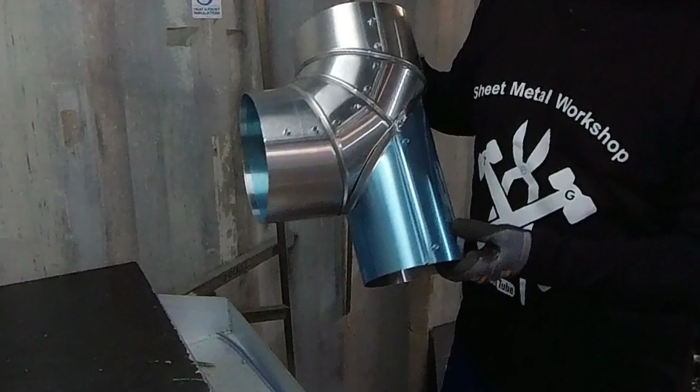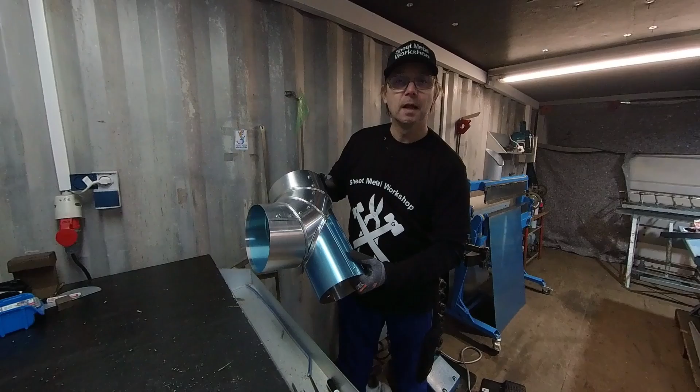In this video I'd like to show you how to make a trunnion. It's like a T-pipe coming on a segment bend, and that is what it's all about in this video. I'm just going to show how to make the template, and you can already see the end result of it, so let's start.

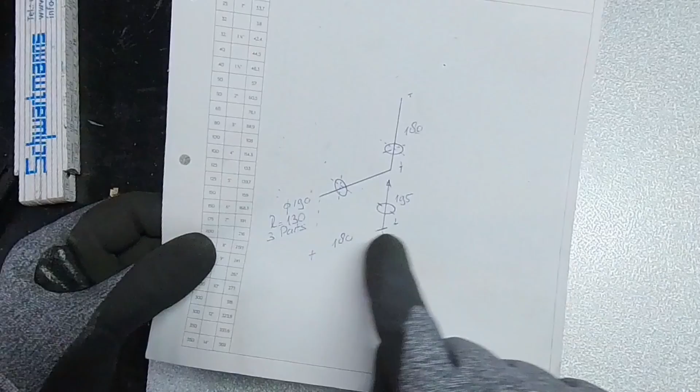Okay, so now I have here in front of me a sketch I've made already, and this is the bend. It's got a diameter of 190 millimeters, radius 130, and it's made out of 3 parts. And then we have here the trunnion coming. It's a smaller diameter, 150 millimeters. From the end of the trunnion until the center of the pipe, we have 195 millimeters. And from the center of the bend until the end of the bend, we have 180, and here also 180.

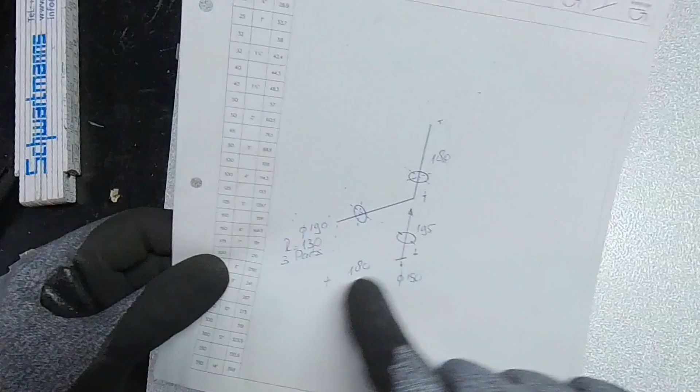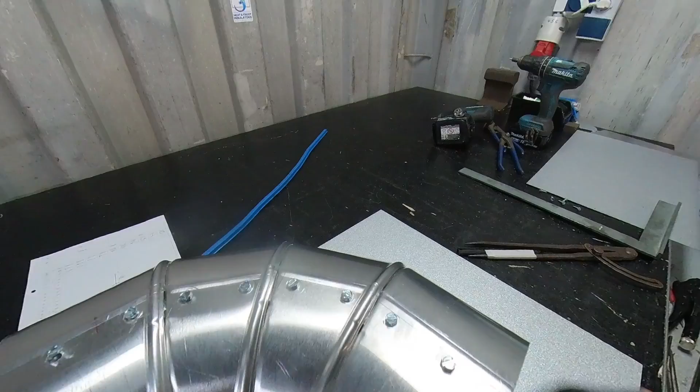Okay, that means the trunnion is exactly on the center line. I have here already the bend, and what I need next is an exact side view of it, actually 1-to-1. So this is how I'm going to draw it, a side view, and therefore I'm going to mark here first a 100 millimeter line, a working line first.

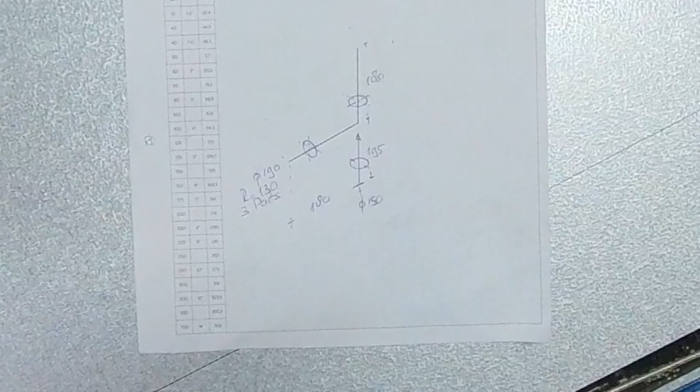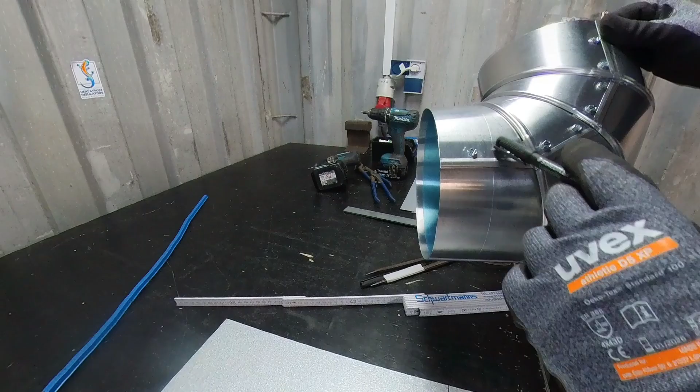Okay, so the radius is 130 and we have a distance of 180. That means 180 minus the radius is 50 millimeters. If I have here my bend and 130 is the radius, this is my half segment, then it is plus 50 millimeters. So I'm going to give here also plus 50 millimeters. Now, this is the plus 50, and from this line, my 0 line, also plus 50.

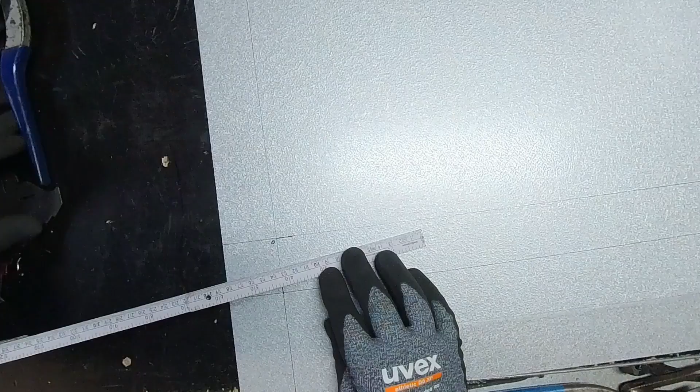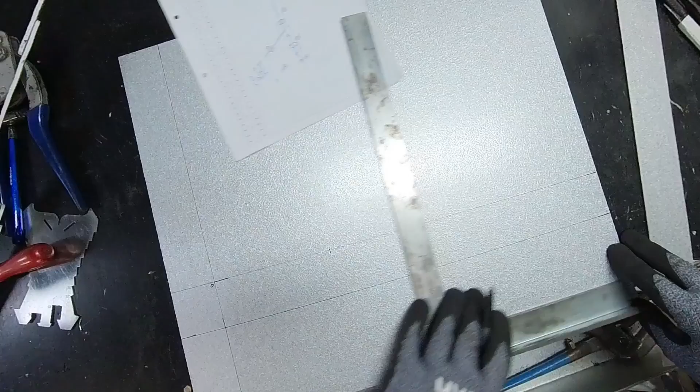Okay, so now this is my 90-degree angle, and this is my point 0. From this point I go the radius, which we said was 130 millimeters, so I go 130, and the diameter was 190, so 95 is half. So now I can drag over here the center from this, and I'm going to take the diameter.

And now from the 0 point, I take this point here, the outside diameter, and drag it over here. Same thing with the center line and the inside radius. Okay, so here I can already make a circle. That's the diameter of my bend.

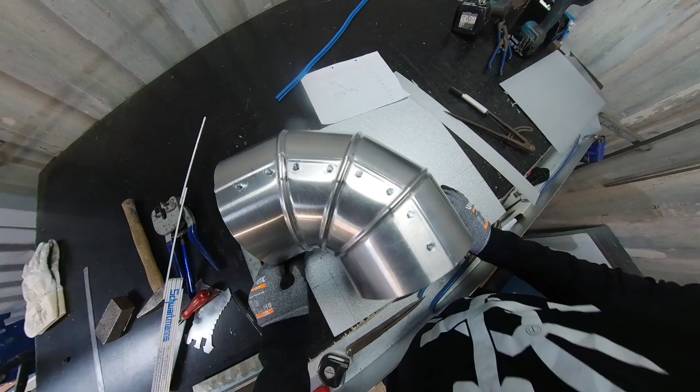So what I'm doing next is I'm going to pull up these lines first. Okay, so this is how it should look. It is exactly on it, so we're good.

Now, if you look at this bend, I need 2 full segments and 2 half segments. The 2 full segments are in the middle, and here we have a half segment, and here a half segment. So I'm going to first divide this angle and put in a 45-degree line to split this corner in two.

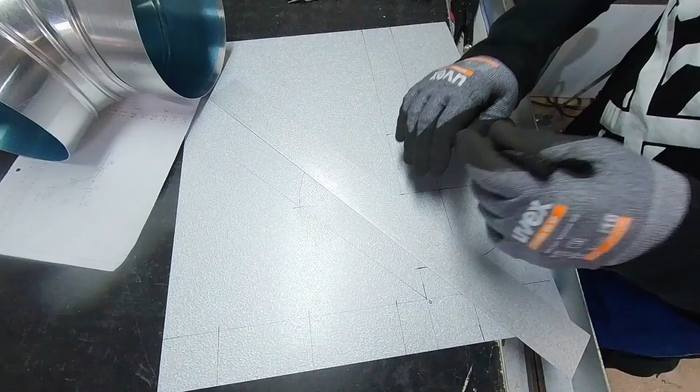And now I'm going to take the radius, put it here on this point, and just like you always divide a circle, I'm going to mark this little bit, and then take this piece another time in the bow divider and swipe it from here, and this side also.

So if I go back again here, see, that is my radius, and it's exactly divided. So now I have a half segment, full, and a half segment. Now just pull the lines. Okay, next we can already connect this one.

Almost there. Now again take the bow divider, and again from the 0 point I go to this point where it touches. See, that must be the same here, and now I just mark it and connect it again. Okay, so far so good.

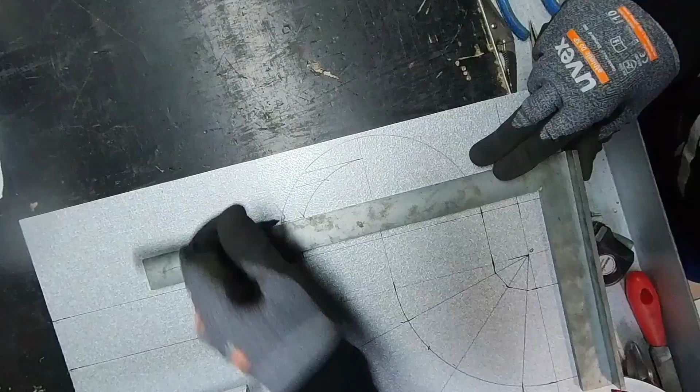And now we're going 90 degrees, so I'm going to turn the metal. We pull those 4 points, one, two, three, and the fourth is already there, up to where they touch the big circle. So these are now my points. And now I'm going to pull up those points 90 degrees up until the first angle here.

So these are all in position, and next I'm going to copy over from the 0 point this point here and drag it onto the other lines, and do the same with these two. Okay, so now we've dragged all those lines over.

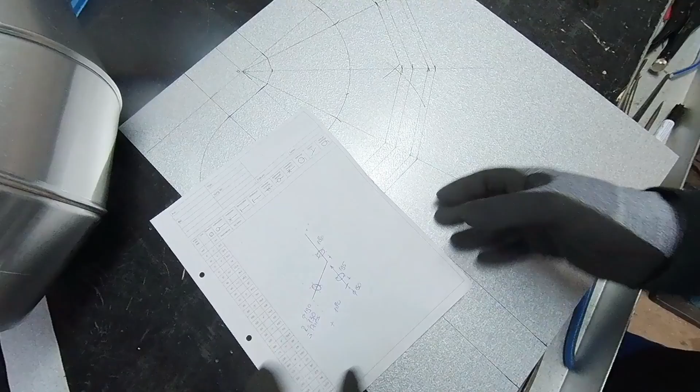Now, the bend is like this, so I'm going to turn it. That's the position of the bend, and the T-pipe or trunnion comes under it. The isometric from the center of the pipe until the end of the trunnion is 195 millimeters. The center of the pipe is here, this is the center line. We go 195 millimeters down, and I'm going to mark it here.

Next I'm going to put a line at 90 degrees, and from the other side of the bend, this here is the center line, I also go down 90 degrees, and I can already pull this line.

And now I'm going to draw my diameter of 150. So I'm going to take 75, and again here, divide it.

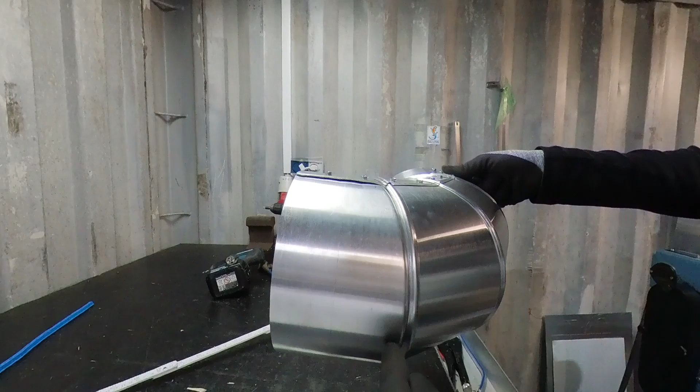We have here this edge, this difference, but because they're both on the same line, that means you have here the bend, and one point is here and the other one is on the swage, so they are both on 0. So there we don't change anything. But here we have a difference. This one is higher, so I'm gonna mark also that little one here.

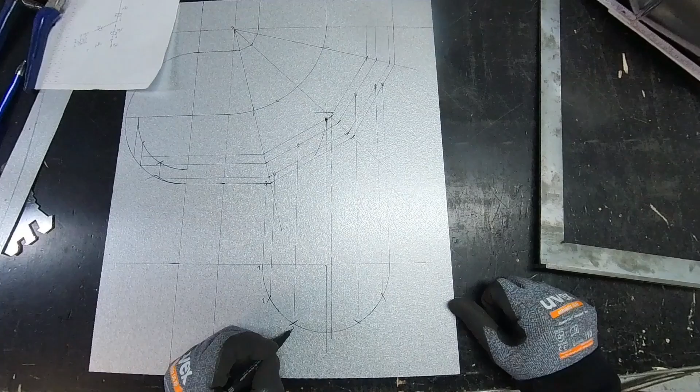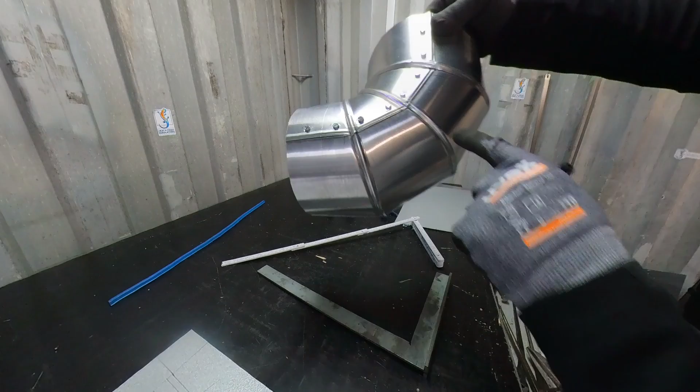Okay, now next thing we're going to do is number it. So we're going to start here with number 1, 2, 3, 4, 5, 6, and 7. And here, on the swage where the break point comes, we call that B, break point. Okay. So now we have everything we need. We have the sizes. And next we're going to drag it over on a template.

Okay, so now I have already a metal, and it's the circumference of 150 millimeter diameter. So I have here 471 millimeter plus 2 times 50 millimeter overlap. So I'm gonna give here 25 millimeter working line.

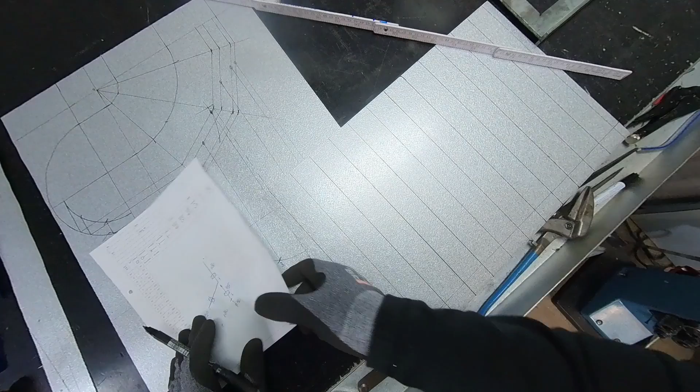Okay, now I want to have the seam here on the side. So this is here the smaller point, and this is here the back. So here's the back, and we want to have our seam on number 4 for the template. That means I'm going to start here at the beginning with number 4.

Then we go backwards. 3, 2, 1, and then we go back 2, 3, 4, 5, 6, 7, 6, 5, and 4. Okay. Now what we need to do first is to drag over point B, and point B is between 4 and 5. Because B is really small to take in the bow divider, I'm gonna take from 5 to B,

and then here on the template, this is 5 going to the 4, so in this direction, here, and here. So these are my two lines that fall on the swage, on the angle.

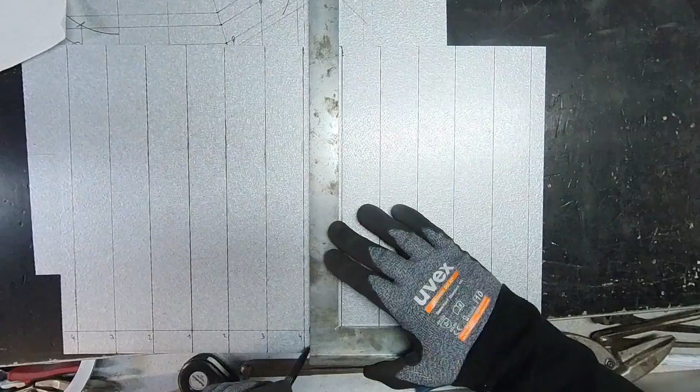Okay, now we're good to go. We're gonna drag over those points, like we usually do in all other videos. So every time it's the same method. So number 1, 1, and then number 2 we go 2 times, and so I go on and on until my template is done.

Okay, now the only point left is B. Okay, it's really minimal. Okay, that will do. Good. Now next step is to connect the line.

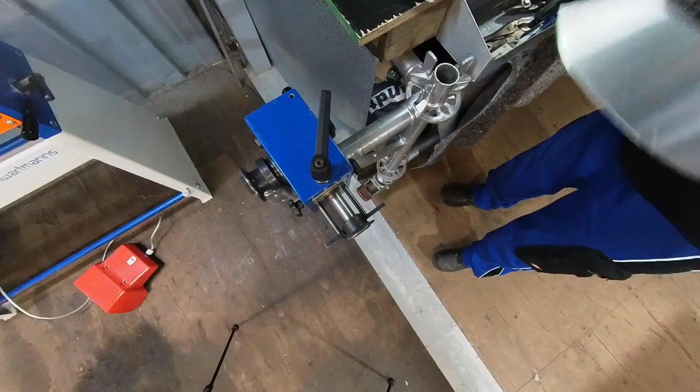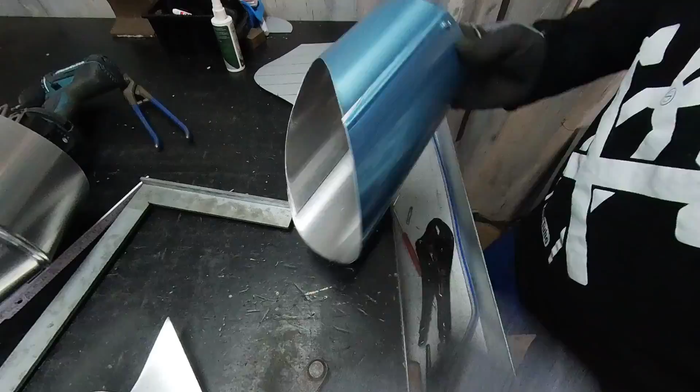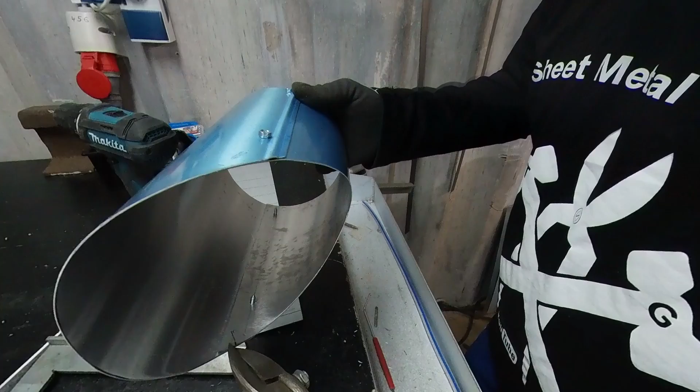Okay, so here is that break point. Okay, so now I'm gonna put it in 2 side swagers and round it. So here I'm gonna just snip it a little bit. That is about here.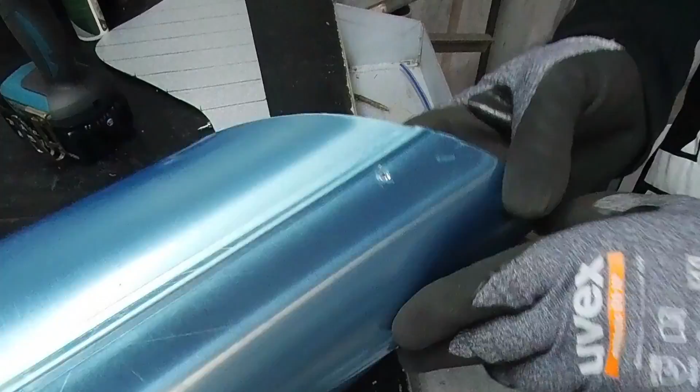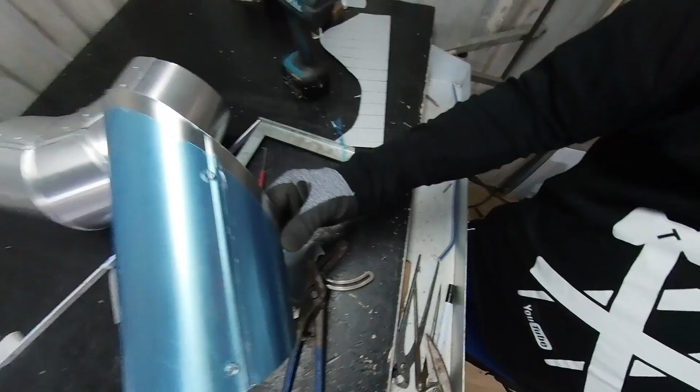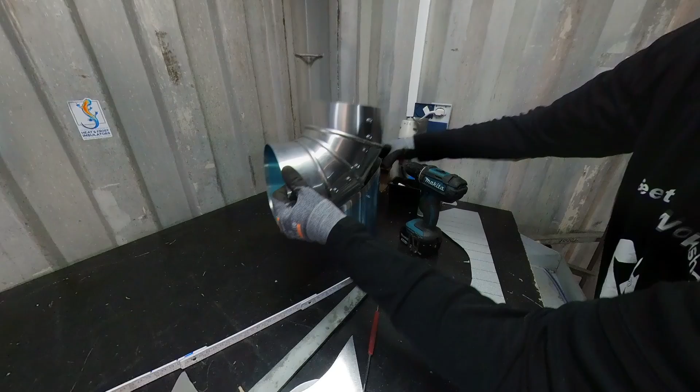Okay, so to avoid swaging double material, I'm gonna cut here a little bit out. Okay, now the tronier is almost done, so this is the way it should fit from under, looking like this, right here. So I've marked here where the swage comes, same thing at the other side.

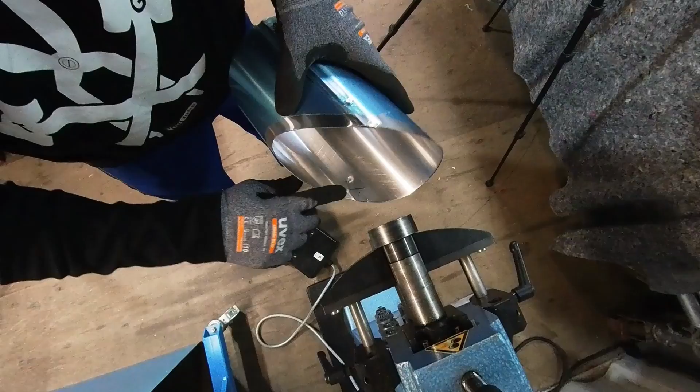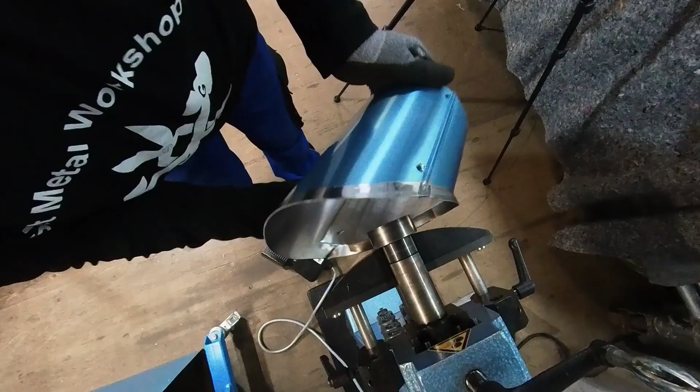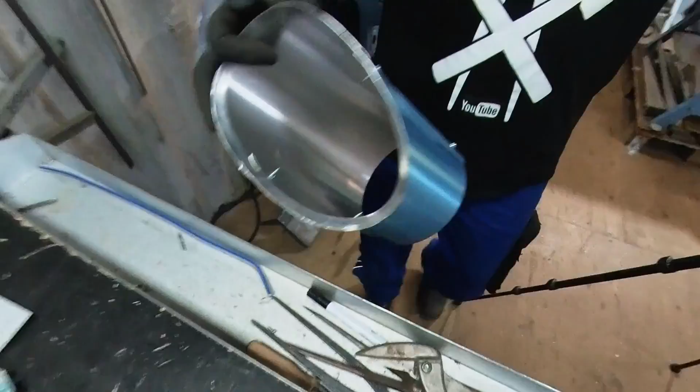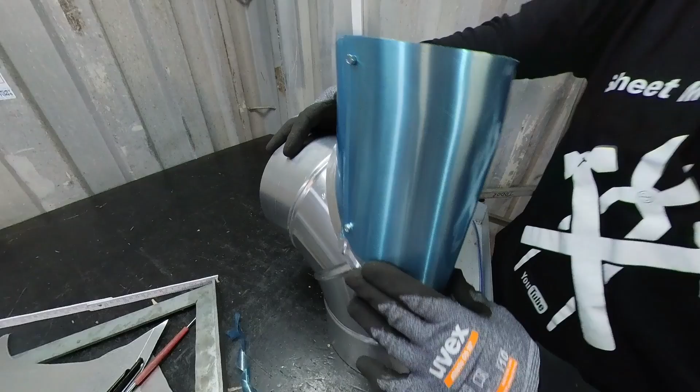Okay, so let's make a swage. Oh, wait a minute. I forgot to cut the other side out. Okay, so now both sides are cut out and now we can start. Okay, I think that looks good enough. Let's have a look. Okay, that's the way it should fit.

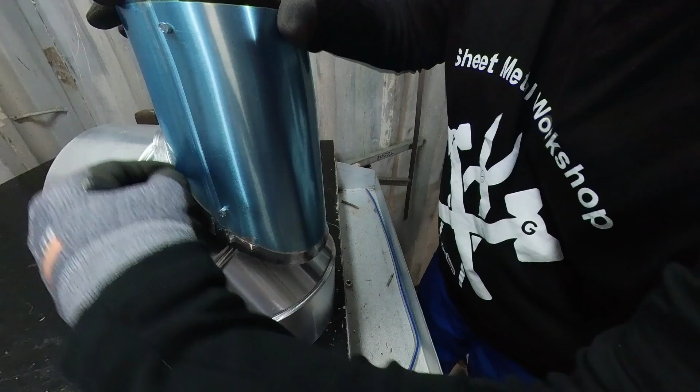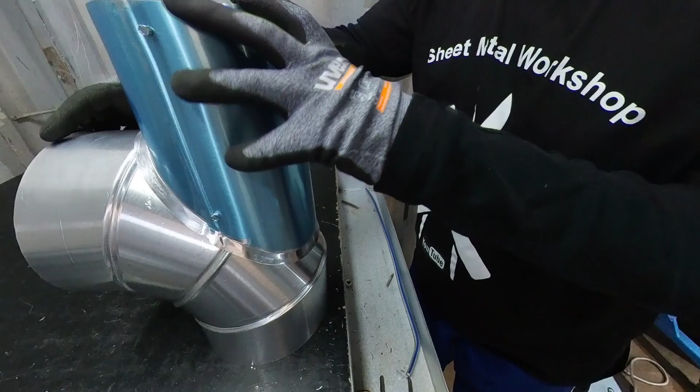So normally you can also, before you put in the swage, mark it exactly on the bend and do the cutout, because sometimes the flat swage comes underneath the metal, depending if it is outside or inside. In this video I want to show how it's done from the outside, but it's also possible to put the flat swage under the metal.

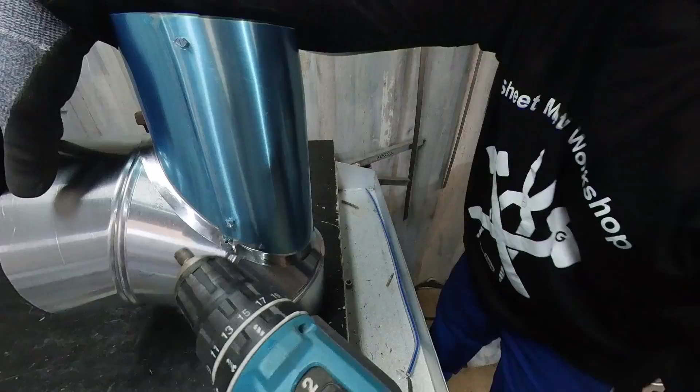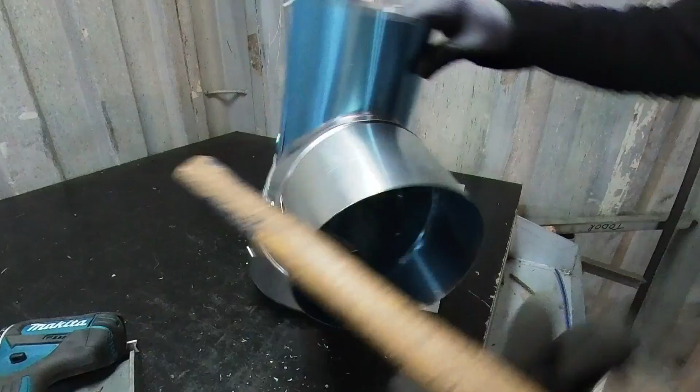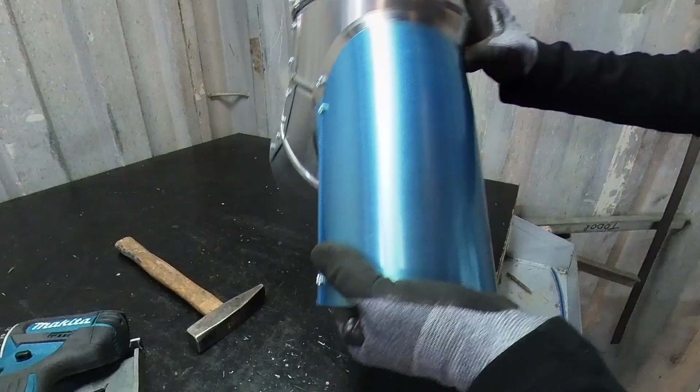So I'm gonna now drill a couple of holes. I think it's in the right position here now. And here we go a little bit with the hammer. Okay, well, that's it. I only put 2 screws. You can also put in another screw. But that's the end result.

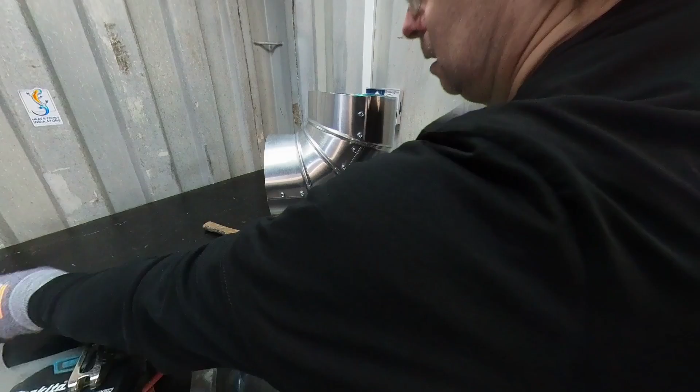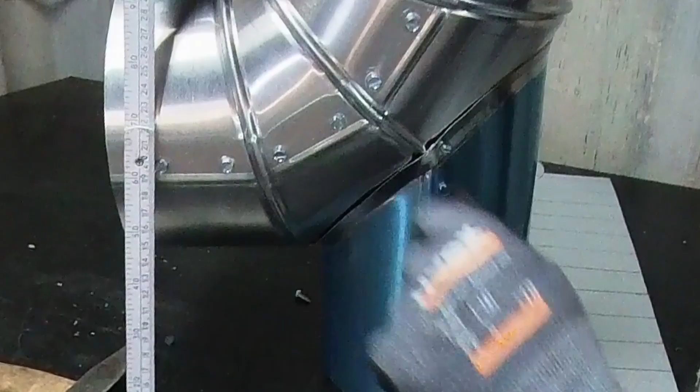Okay, so this is it. So now I need to check. The screw here is the center, and see, I have here 195 millimeter. So that's it.